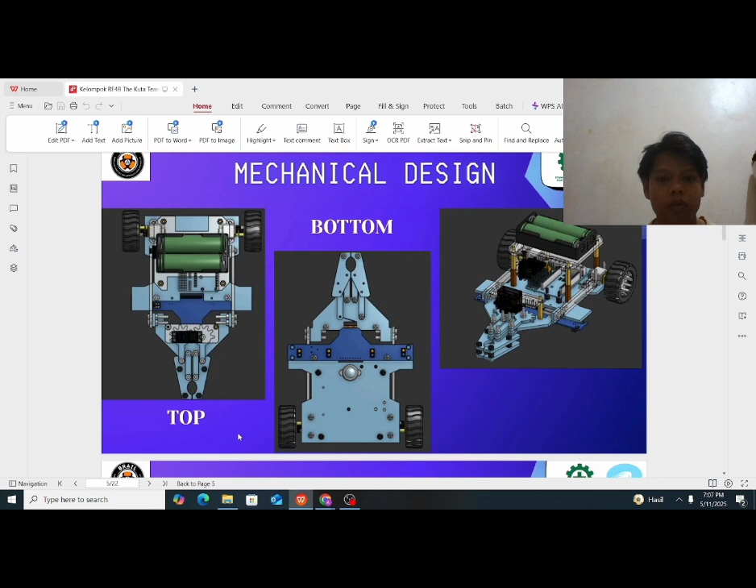Provide a small-scale automation solution that can be applied for light industry, education, and research purposes. Integrate hardware and software into a fast, responsive, and reliable robotic system. Next. This is the mechanical design, from the top, bottom, right, and back.

Weekly progress. Week 1, we did the design of the line follower robot, starting from steering and the sensor, movement mechanics, and frame shaft. Week 2, we were still making the design, namely the main form, material, components and microcontroller, motor, lever, and sensor installed on the main wheels, with a balancer so that the robot does not fall. Week 3,

first we had the robot designed on the basic part like the flat base. In that part we have the components on the wheels and batteries. Week 4, create a robot structure design in acrylic with 2 levels, wheels, and electrical components. Week 5, make a few components such as the sensor, Arduino USB, wheels, battery holders, and servo. Week 6, the team continued the initial design progress of the line sensor design using CAD.

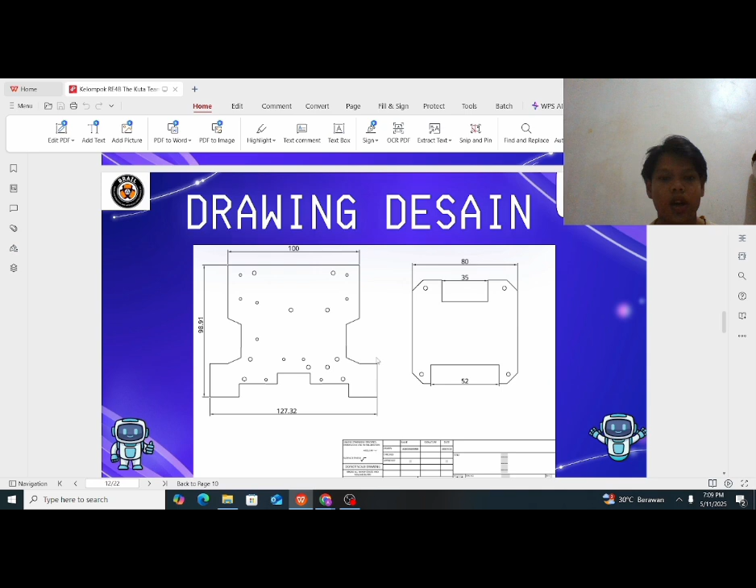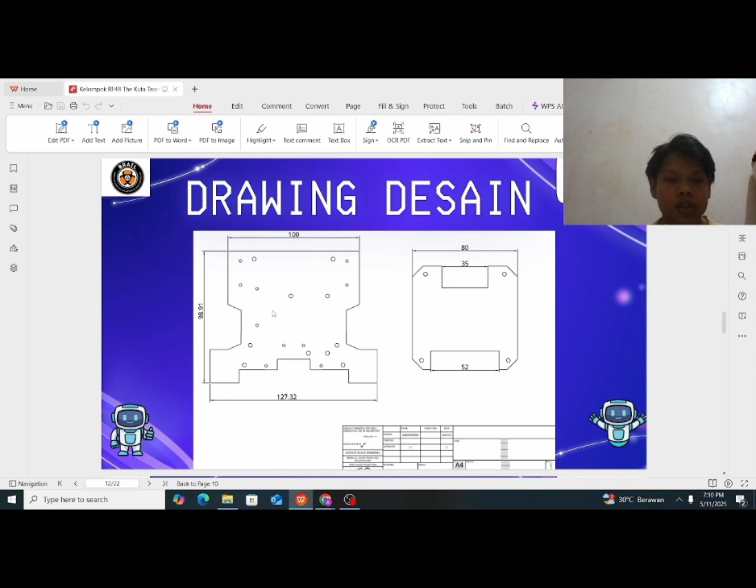and this is the drawing design. 1. This is the drawing design of the base body, and this is the form design drawing: the front width is 12.7 centimeters, the back width is 10 centimeters, and the length is 9.8 centimeters.

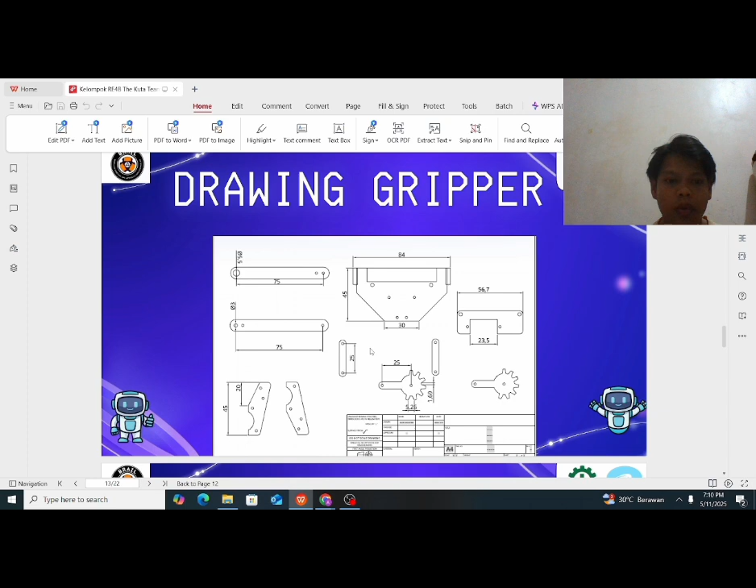2. This is the upper base part, and the gripper drawing. Next, the gripper drawing, and the gear for the gripper. Thank you. Continuing with the next discussion about the flow chart. Here is a simple process that we have, first.

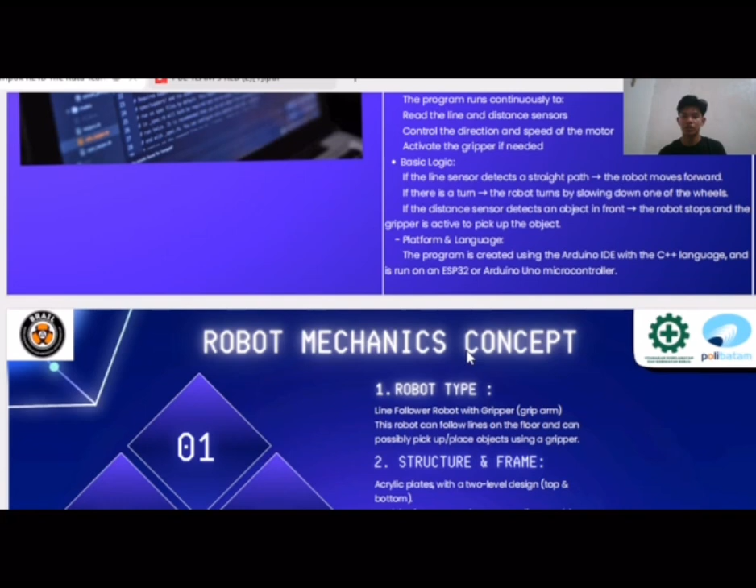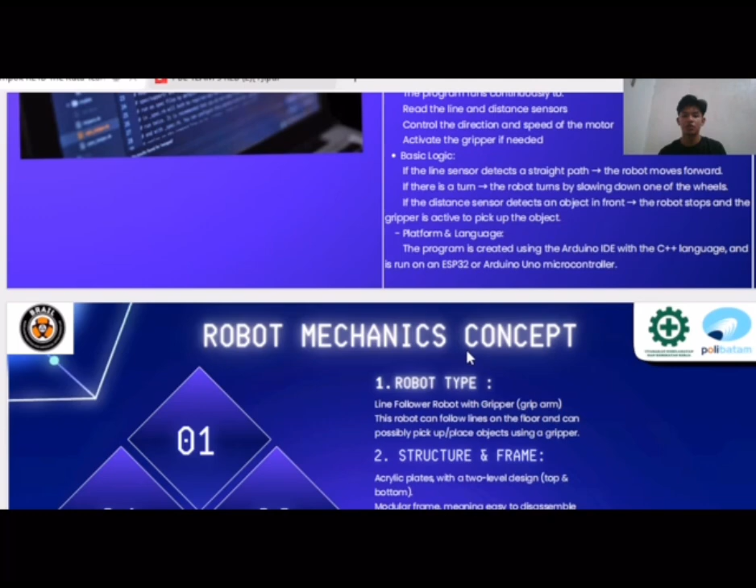Basic logic. If the line sensor detects a straight path, the robot moves forward. If there is a turn, the robot turns by slowing down one wheel. If the distance sensor detects an object in front, the robot stops and the gripper is activated to pick up the object. Platform and language. The program is written with Arduino IDE in the C++ language and is run on an ESP32 or Arduino Uno microcontroller.

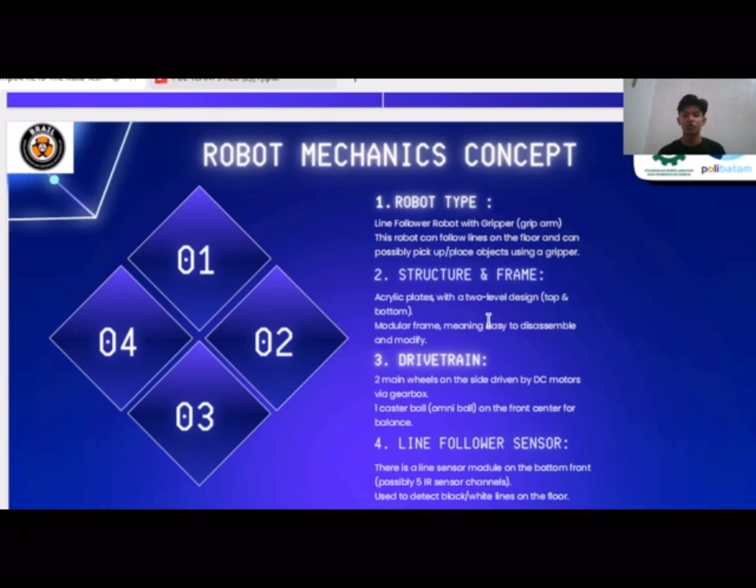Next, robot mechanics and concept. 1. Robot type. Line follower robot with gripper or grip arm. This robot can follow lines on the floor and can possibly pick up or place objects using a gripper. 2. Structure and frame. Acrylic plates with a two-level design, top and bottom. Modular frame, meaning easy to disassemble and modify.

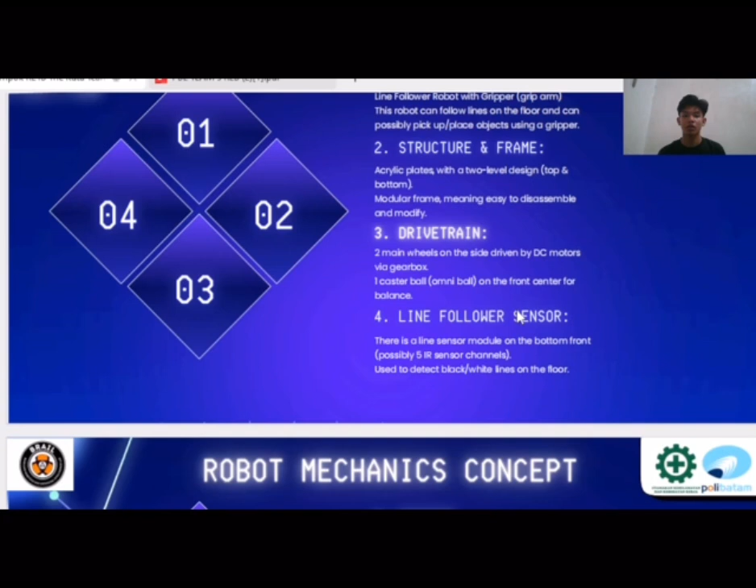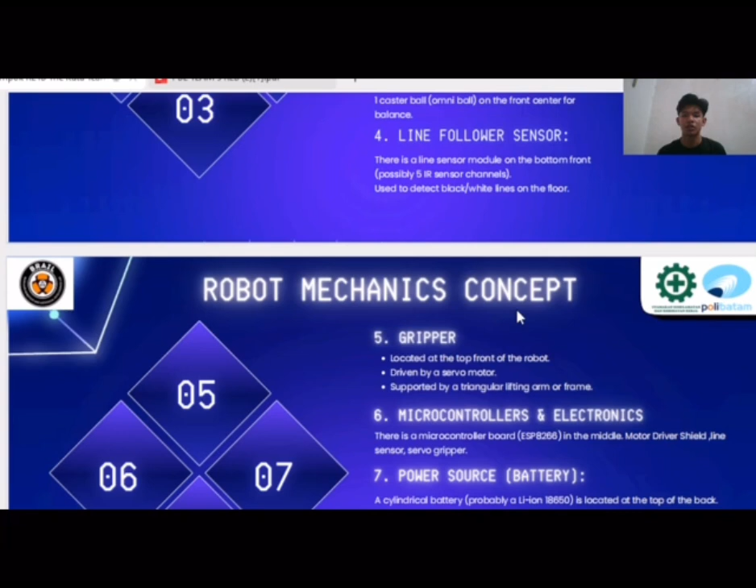3. Drive train. 2 main wheels on the side driven by DC motors via gearbox. 1 caster ball or omni ball on the front center for balance. 4. Line follower sensor. There is a line sensor module on the bottom front, possibly 5 IR sensor channels used to detect black and white lines on the floor. 5. Gripper. Located at the top front of the robot, driven by a servo motor supported by a triangular lifting arm or frame.

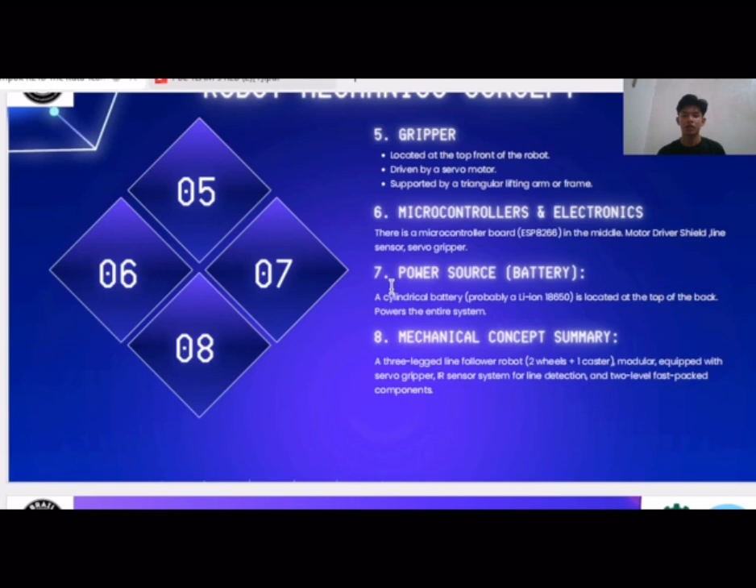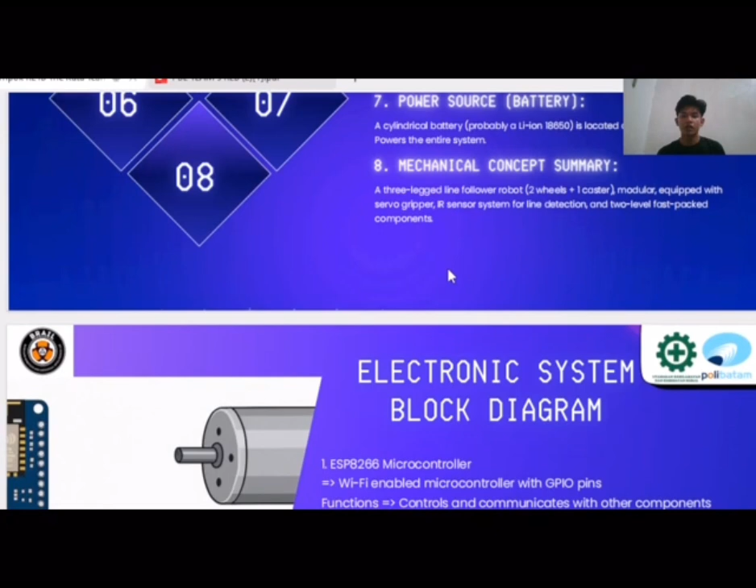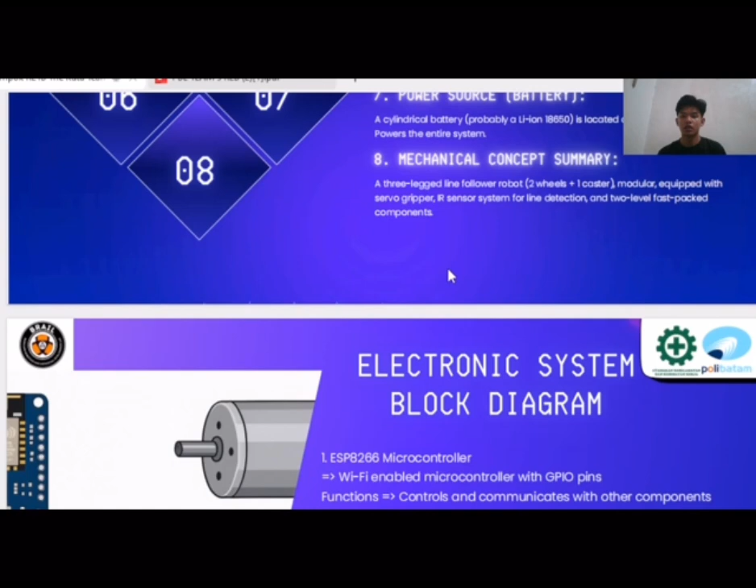6. Microcontroller and electronics. There is a microcontroller board or ESP8266 in the middle, motor driver shield, line sensor, servo gripper, power source or battery. A cylindrical battery, probably a Li-ion 18650, is located at the top of the back, powering the entire system. Last, 8. Mechanical concept summary. A 3-legged line follower robot, 2 wheels plus 1 caster, equipped with a servo gripper, IR sensor system for line detection, and 2-level compact components.

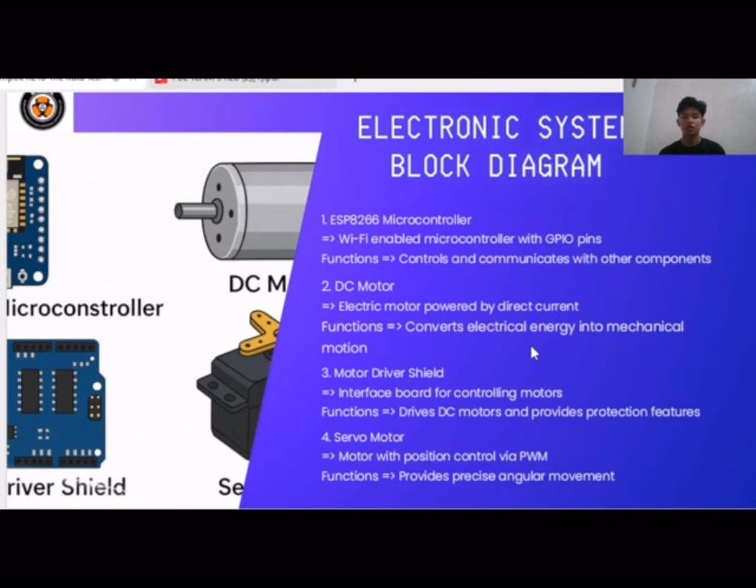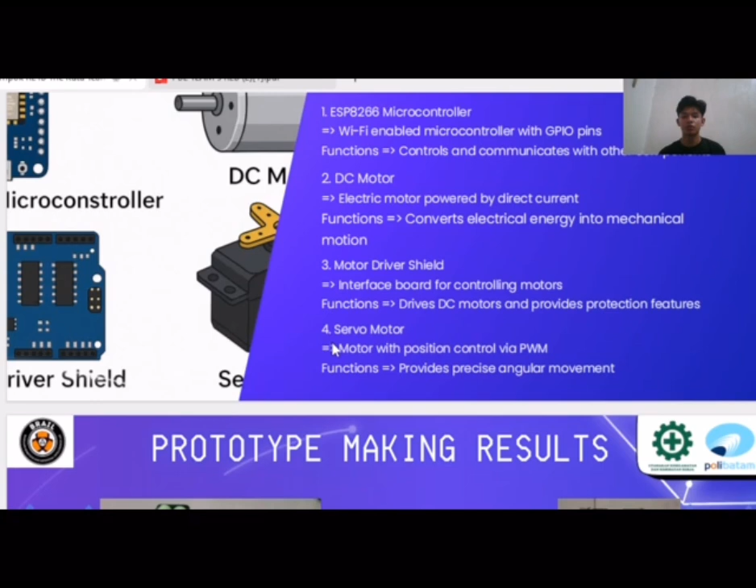Next, electronic system block diagram. 1. ESP8266 microcontroller. Wi-Fi enabled microcontroller with GPIO pins; function: control and communicate with the components. 2. DC motor. Electric motor powered by direct current; function: convert electrical energy into mechanical motion. 3. Motor driver shield. Interface board for controlling motors; function: drive DC motors and provide protection features. 4. Servo motor with position control via PWM; function: provide precise angular movement. Thank you.